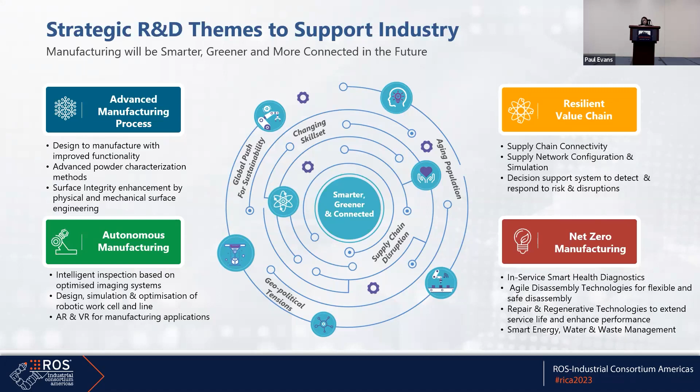The other part is on the resilient value chain, and finally in supporting sustainability towards achieving net zero manufacturing. Now with that in mind, I am going to now move on to what ROS-Industrial Consortium Asia Pacific really does. So I mentioned earlier that across the three consortia, we are the youngest.

We started with 4. Today, we have about 20 over members. We have also recently been joined by another institute of higher learning, Korean Poly, and we also have in our pipeline a few more companies that are very, very keen to get on board.

This is a very interesting development for us, and especially with the Asia Pacific. I think a lot of times when I just joined, a lot of people were like, oh, what is ROS? Why do I need to use ROS and all of that? But today, moving forward 5 years later, we actually see people really coming and saying, hey, can we really join the consortium? Can we help and support that? How can we get on board? And what do we need to know to apply it for ROS-Industrial applications?

We're actually especially seeing a lot of interest coming from the Japan region, for example. We see a very, very strong demand from there. So if you look into the logos that we've got within the consortium, we have about 7 to 8 members really coming from Japan. So looking into that, we're probably looking to be able to support that further moving forward.

With the new changes on the organization structure, and also looking into how we need to better support our members and what they're actually focusing on, recently we changed our organization structure to help us focus more on our capabilities. So there are basically 2 broad categories that we are focusing on. One is called intelligent robotic manipulation, where our focus is really supporting development in the perception and manipulation capabilities that the industry can hold and leverage.

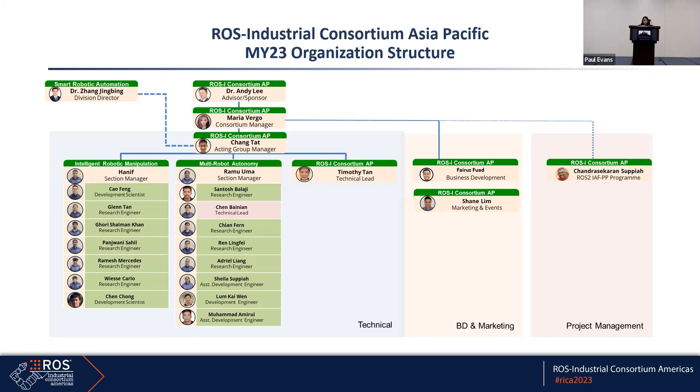So when we started this journey 5 years ago, we did a lot of development, proliferation, marketing, outreaching, and really tried to gain a sense of what the entire community was wanting. And I really did resonate with what Sean mentioned, right? It's like, oh, why do I need to use ROS? Is it really ready to be used for industrial applications? We did face that in the very beginning. So a lot of my predecessors were really focusing on and supporting outreach and showcasing project after project.

But 5 years into the road, having finally gained some momentum in showcasing the power of ROS and how we can really help and support the community, we thought it is also about time for us to look into our strategy, how we can be a bit more focused, a bit more structured, in the way we support the community. So this year we are focusing on how we want to do that, and there are basically three key focus areas for the consortium. The first one is really developing the capabilities.

Recently we conducted our members road mapping session, and across the entire membership, one thing for sure is that people really lack talent, right? We are pretty young, very new, and a lot of people really want to use and adopt ROS. But when we look into who can really develop and support something, we do not see a lot of that, at least in the region. So to support that, we developed a new program called the Train and Place program, where we develop training and support internship, secondment and placement within our organization, so we can handhold the industry in really leveraging and adopting ROS.

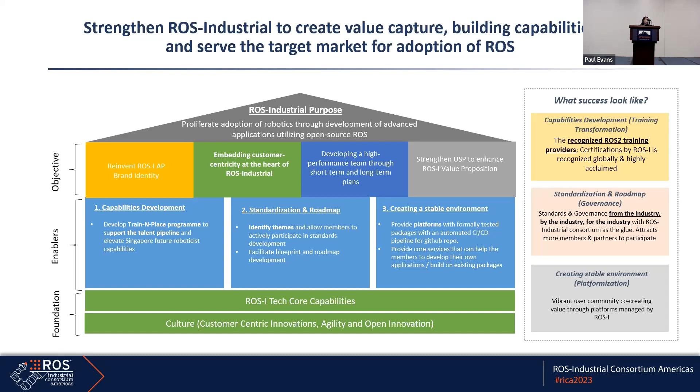So with that in mind, I'm going to reintroduce the key topic of what I want to talk about here, and how we are really categorizing our activities within the consortium. So there are basically three levels of research domain that we are focusing on, from component level to subsystem and system-to-system kind of applications.

So on the component level, we are looking into developing what we call a universal robot controller. The whole idea here is that if, for example, we wanted to develop a bespoke robot application where you wanted to put in different brands and models, let's say a different model for your arms, a different model for your mobile robots, we wanted to see how we can enable that a lot easier. I'll talk a little bit about that in my subsequent slides.

So the whole idea is to do an inverse kinematics that will be able to then translate it into the ROS packages, so then we are able to leverage ROS advanced applications.

The second one is really to help in developing a ROS 2 driver framework. At least in our community, or where we are coming from, there's very little guidance on how we are supposed to be developing a ROS 2 driver framework. So this is currently an effort that we are working on together with one of our members to help build how the ROS 2 driver should look, so then they're able to replicate a similar effort should they want to develop the ROS 2 driver for their application moving forward.

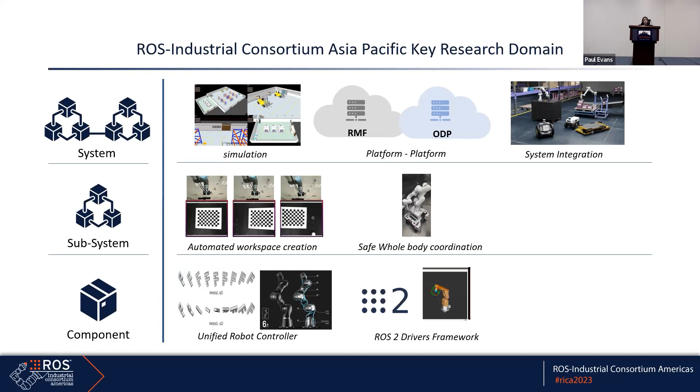And finally, looking into the system-to-system capability. This is really bringing all of these elements together across the entire spectrum, from design all the way to operation. So looking into the simulation, the platform capabilities, and the system integration that really pull all of those things together.

Okay. So this is the first one that I mentioned earlier, where we are looking to develop the packages that help in developing a ROS 2 native universal robot controller. This is part of a program funded by the Singapore government under what we call the ROS 2 IAF-PP Program. It's a pre-positioning funding that helps to support platform and foundational technologies that the industry can then take up and leverage on.

So the whole idea is to develop a compact hardware and software system that will be able to provide direct communication between the robot actuator and the ROS 2 framework, to really utilize all the different high-level ROS capabilities existing out there in the market.

Where we are really focusing in terms of research is to create a hardware-level direct communication with the ROS core modules, and developing adaptive kinematic and inverse kinematic modeling for multi-axis configuration. We are looking into greater than 7 degrees of freedom there. We're looking into nonlinear interpolation for smooth robot trajectory and velocity profile. Here we also wanted to focus on how we can minimize the RMS error.

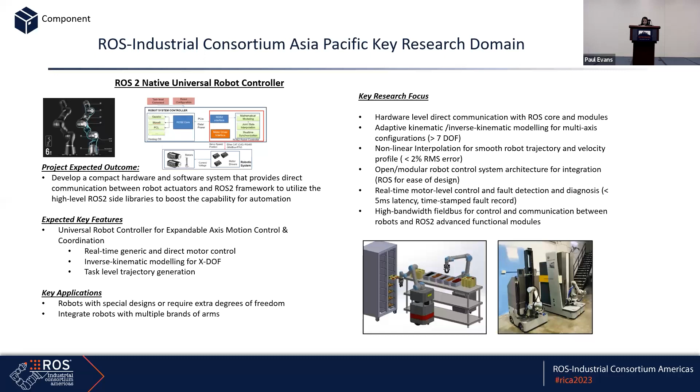The second one that we are developing is the ROS 2 driver framework. We are developing this in collaboration with one of our members. They're very new to the ecosystem, though they have been around in the market as one of the global leaders. When they came to us, they had zero idea how to develop ROS 2 drivers. So we took a lot of time to educate them and share how it's supposed to be built. And the great thing is there are so many resources within the community that can help support that.

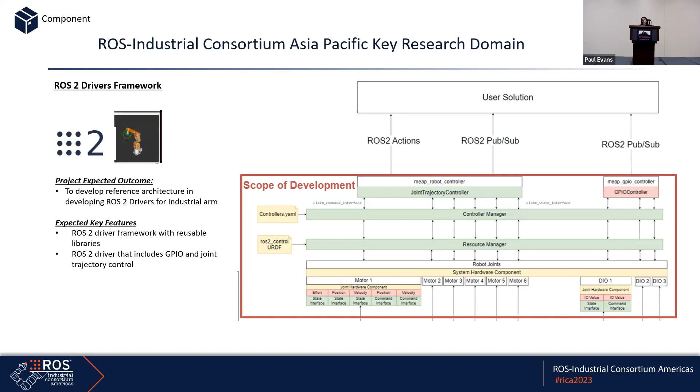Where we want to contribute back to the community is that once we develop this for these companies, we want to share the learning points and how we're structuring the ROS 2 driver we're developing for them. We're including GPIO and joint trajectory control in this development. We're just starting this project, so hopefully the result will be out by the end of the year. Once the ROS 2 driver has been developed, we will open source it and share it with the community, so the community can test it out and see what improvements can be put into this driver.

Moving on to the subsystem level of development. We are looking into technologies to do auto configuration and self-tuning of very complex digital workspaces. There are two types we're looking into. The first is precision and creation of artifact-free pose estimation using fusion-based 3D localization, able to self-correct and compensate any drifting that happens over time.

The second is to look into very large objects and a very large field of view workspace, where we can stitch all of the different sensors, be it LiDAR and cameras, put all of this information together, and generate a workspace that we can then utilize for multiple different applications.

On the right side is the development of a technology to support safety-assured autonomous mobile robotic automation. Here we are looking into whole robot body coordination. Where we envision these capabilities going is a moving robot with arms that is able to do a task on the go, without having the mobile robot stop. But not only from the kinematics perspective, we also want to embed safety. If the robot identifies potential obstacles coming in, we want to be able to identify that. So there's a lot of balancing between performance, kinematics and safety. We want to put this forward in a high-density manufacturing environment, for example.

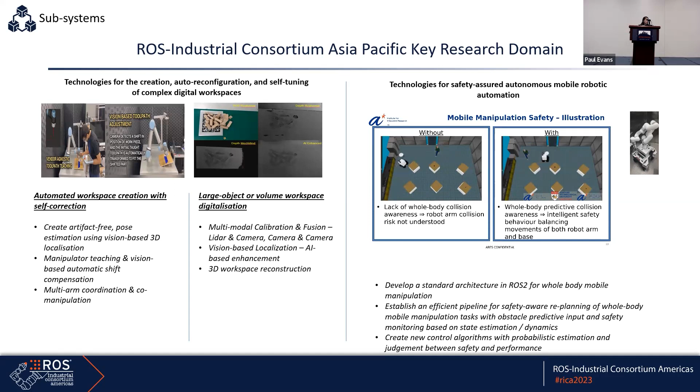Then I also want to talk about one of the results of the focused technical projects. This is the very first technical project.

How much longer do I have? Five minutes? Yeah, about five minutes. Okay, I'll try to speed this up a little bit.

So this is actually our very, very first focused technical project that we had just completed in December. This development is being conducted in collaboration with our members, Johnson & Johnson, Infineon, as well as Delta. What we wanted to develop is a technology demonstration for the Robotics Middleware Framework, specifically for logistics applications. As you're probably already aware, RMF was created previously for the healthcare sector, and in order for it to be adapted for other industries, there are several things that we feel need to be done and researched.

So the first thing that we developed as part of this technology demonstration is two main use cases. The first one is order and replenishment, and the second one is inspection. One of the greatest differences between healthcare applications and logistics or manufacturing applications is that, to really achieve autonomous operation in manufacturing, there has to be a way for the task to be triggered by some kind of external conditions, right?

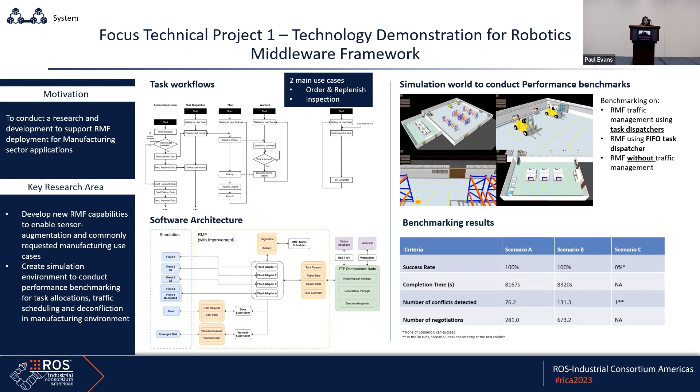So the whole idea there is that if, for example, we put some gas leak detection sensor on the robot, and the robot is conducting some surveillance and detects certain anomalies, it will trigger another task dispatch within RMF to send another robot to go and do some kind of inspection in certain areas. So we developed assets as well, and we developed the logistics flow within this FTP. The results of this will all be open source within the next two months.

So I'm going to just share a very, very quick video of what we were developing. Oh, there's no sound? Okay, that's okay.

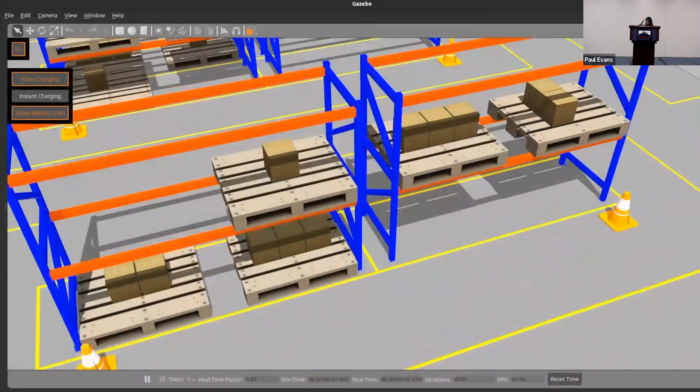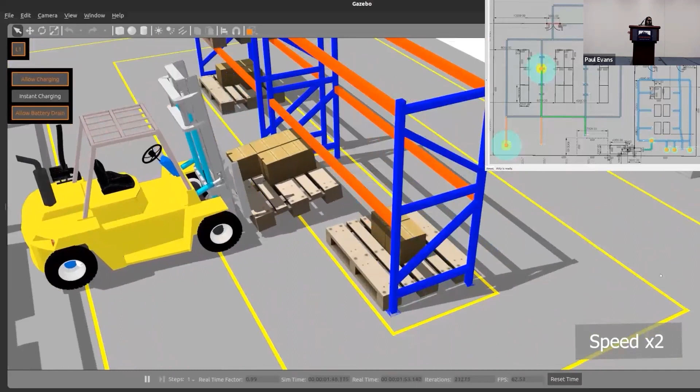We created the assets and the inventory there, whereby all of the assets can be reusable in Gazebo, so you can utilize them once we open source all of the assets. We created the forklift and the workflow integration as well to help in adopting the Robotics Middleware Framework for logistics applications. Here we see the robot goes and picks up the order. The order tracking was being shared through RMF. We created two new task definitions to be able to conduct this.

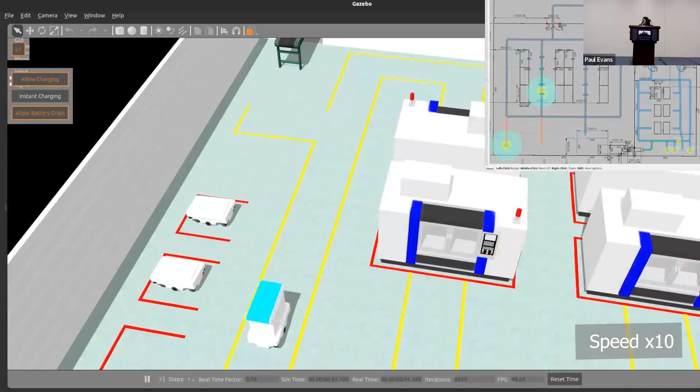So we have this simulation asset as well, now fully integrated with the conveyor. As part of this, we also did some benchmarking on the type of task dispatching mechanism that we needed, with a few different scenarios. This is where the robot picks up the order and does the replenishment. As part of the tasks, we have a work-in-progress mechanism. The robot can go and pick up an order at certain locations, and if there is very low inventory, we'll trigger another robot to go and replenish first before they complete the task.

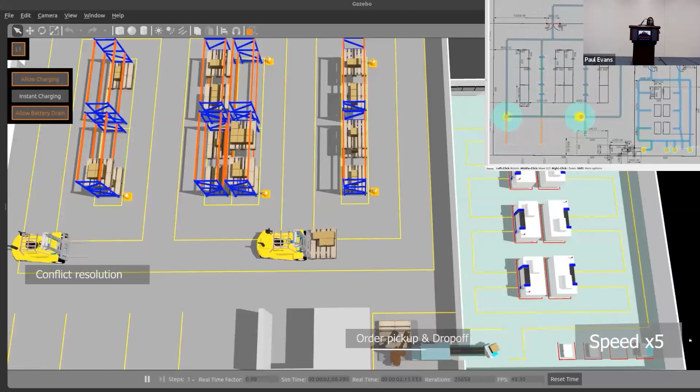Am I out of time already? Yeah, two more minutes. Okay. Let me see how many minutes.

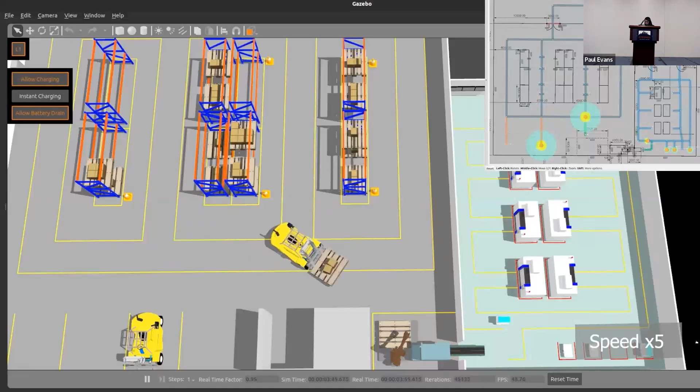Yeah, so as you can see here, all of the different robots are working together in this logistics world. Okay, I'm going to try to speed up this particular thing if I can. I can't.

Okay. So that's a very quick snapshot of the result of our first focused technical project with our members. We are developing the second phase of that, and we'll be focusing on repackaging some of those integrations that we talked about earlier. These are all of the new packages that we will be releasing very shortly coming out of this focused technical project, notably the workflow integration, the new custom task manager, and a few different assets that we are developing as part of this logistics application for RMF.